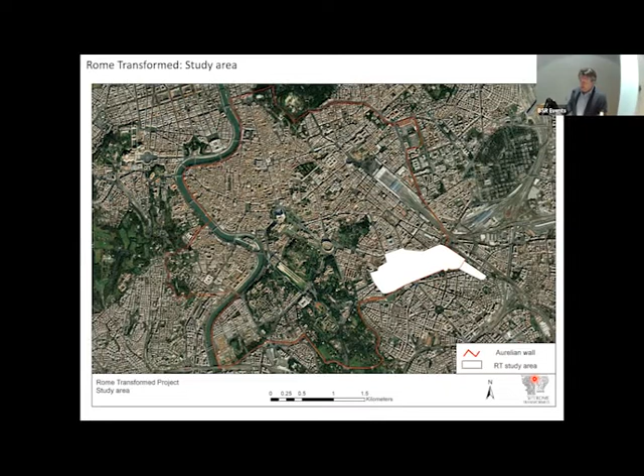Previously, the principal investigators of the project, Professors Ian Haynes and Paolo Liverani, conducted long-term research on the Basilica of St. John Lateran, published by the BSR in 2020.

The Lateran, taken as a starting point, was to the west. The new project has investigated some of the major monuments in this area, such as the Neronian Aqueduct, the 1.5 kilometers of the Aurelian walls, which you can see running along the back there along Via Carlo Felice, and also the final part where we see now in the video, the area of the Sessorian Palace complex at the site of Santa Croce in Jerusalem.

The aim of the geophysical surveys is to assist in investigating the near surface, to understand the appearance and transformation of the area over 800 years, covering 68 hectares in a central urbanized area.

The areas identified as suitable for prospection were divided into subgroups based upon the most appropriate method, given a number of different parameters that can affect each technique.

This evening, I will focus on some of the areas indicated in red, surveyed with single channel ground penetrating radar, which I'll abbreviate as GPR, and some of those in blue, which have been investigated with both GPR and electrical resistance tomography, which I will refer to as ERT.

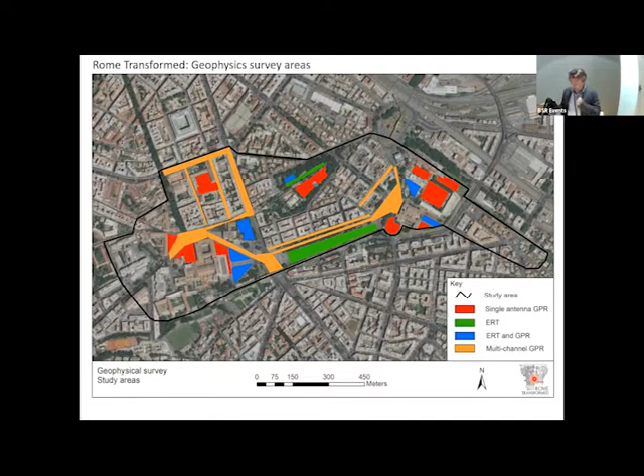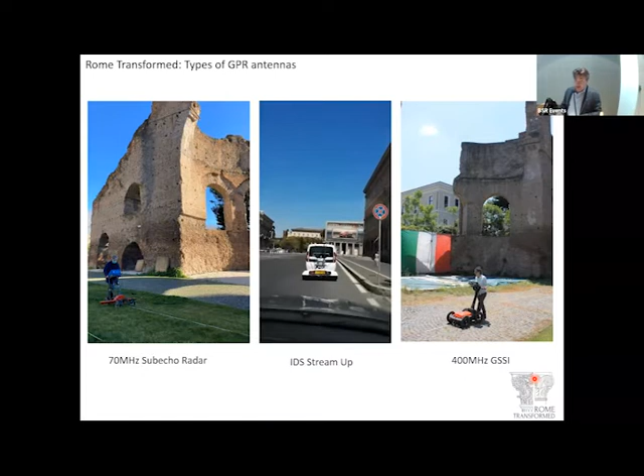I will not dwell in this lecture upon the specifics of the different types of geophysical prospection and the techniques that have been used. There is excellent and long literature on this amazing topic, which is something we specialize in at the BSR for a number of years.

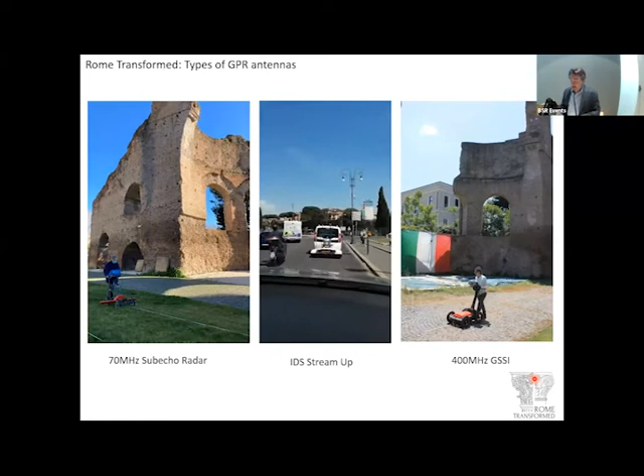I've spoken on a number of occasions about the different techniques we do, and I'm happy to speak to our citizen course students about this should they wish, but this evening I shan't dwell upon the specifics. It's sufficient to note that the majority of the work was conducted using different antennas and configurations of the ground penetrating radar, as it is this instrument which is best suited to modern urban investigations. However, in some areas, this data was enhanced with ERT, the electrical resistance tomography.

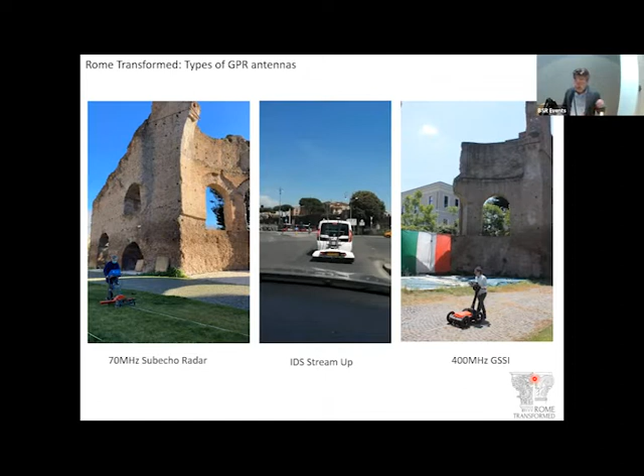Before I begin our journey across the Caelian Hill, I would like to note some of the difficulties faced in this form of investigation in a modern city, which is why this survey is so complex, but it's quite unique.

It is clear from any brief glance at ancient cartography, such as Nolli's incredibly precise map of Rome of 1748, the changes that occurred to the topography of the city inside the Aurelian walls.

Indeed, one of the aims of the project, led by Margherita Azzari at the Università degli Studi di Firenze, is to begin to map these changes in the topography in a 3D environment. From a geophysical perspective, the changes in the topography present a significant challenge.

Topographical features such as Monte Cipollaro to the east have been flattened. This was removed on the order of Pope Benedict XIV between 1741 and 1744, as it hindered the view of the church of Santa Croce from the Lateran.

Whilst to the west, the modern Via Emanuele Filiberto and the underlying metro cuts through the Caelian Hill. This therefore limited our choice in the techniques available, with a particular need for low frequency GPR antennas. These offer a greater depth of penetration, though at a loss of some resolution, and also the widely spaced profiles of ERT.

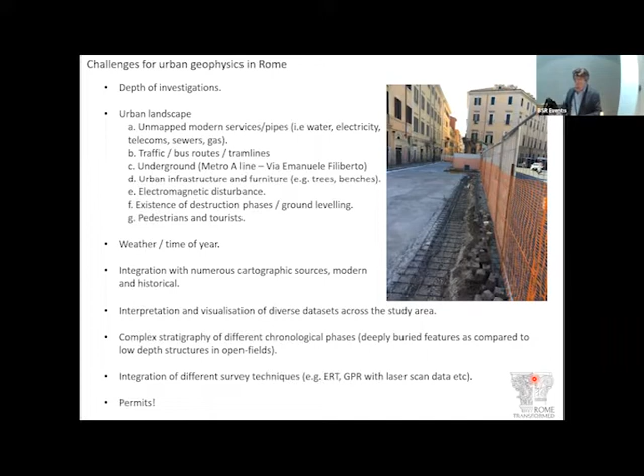The Rome Transformed project stems from a previous investigation of the Basilica. The research strategy and methodology of that project have gone a long way to structuring this new ERC-funded project.

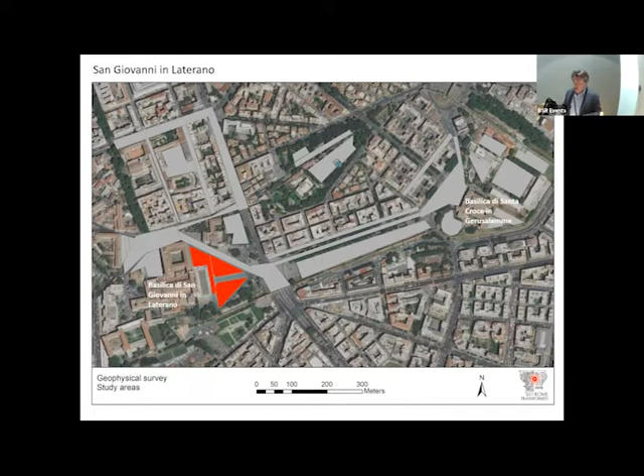The project uses high-resolution data capture and digitally aided interpretation for analysis and to support more traditional scholarly approaches. This form of recording allows the visualization of structures that are otherwise cut and decontextualized by later interventions.

The recording leads to the development of 3D models, termed by the project as provocations, aimed at encouraging wider discussion. The geophysics forms an important element in this process, as it allows exploration of the subsurface across an extensive area, which would otherwise be invisible.

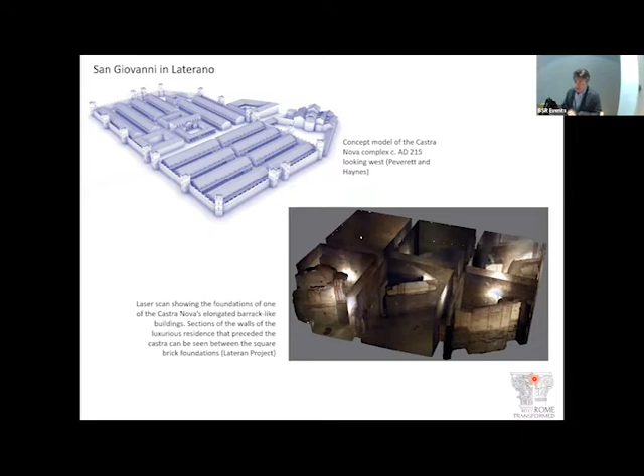In brief, the first archaeological evidence of occupation underneath the Basilica of San Giovanni Laterano is a wealthy residence of the 1st century AD, the fourth style decoration of which suggests a Neronian date. Of importance to a geophysical survey is the depth of these structures beneath the current basilica, an average of 5.5 meters.

The buildings were later replaced by the second barrack complex of the Equites Singulares under Emperor Septimius Severus, constructed around AD 193. At the beginning of the 4th century, these structures were cut to make way for the Constantinian Basilica. The new project has included re-examination of these areas explored with geophysics in the earlier iteration of this research, in particular to extend the survey to a greater depth, as mapping the changing topography of the area is of crucial importance to the project.

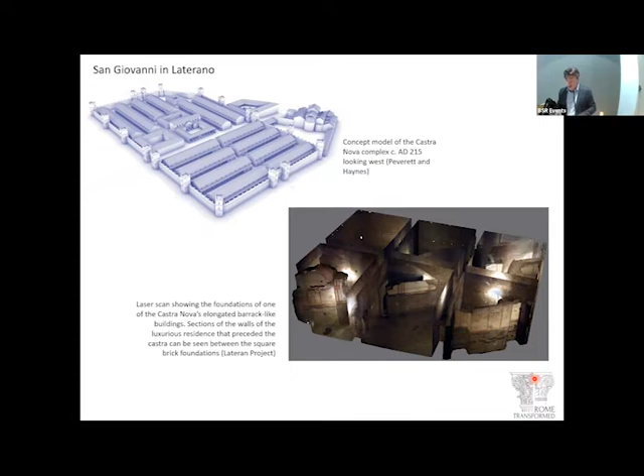Before I show some results of the project, I should quickly note how this data should be read. The GPR data is collected as a radargram, a vertical profile into the ground. Through the collection of numerous profiles in regular traverses, either simultaneously with a multi-channel system, or as individual profiles using a single channel system, it's possible to build up a volume of data that can subsequently be resampled horizontally, where the thickness of each slice can be varied.

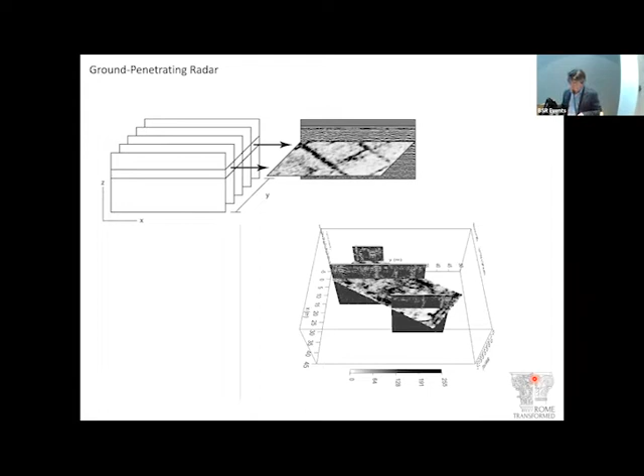Together with various assessments for the potential rate of the radar through the soil, it's possible to give an approximate depth. So as I show you the data we've collected, these should essentially be read as a map. While collected slightly differently, the same methodology applies to the ERT in terms of the collection in vertical profiles and then a subsequent horizontal reslicing.

So here we have our first example of what I'm asking you to look at, essentially in plan. The earlier survey with GPR by Salvatore Piro had been very successful, recording a range of features directly in front of the current basilica, revealing probable parts of the triclinium of the Patriarchium built on the order of Pope Leo III. However, the GPR had limited penetration beyond 2.5 meters.

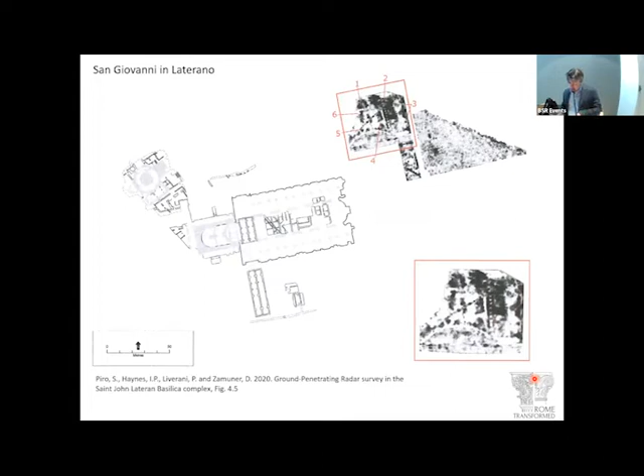We know from the considerable mapping undertaken in the former project, to which I just referred, that Republican houses under the basilica can be at a considerably greater depth. So the houses we're talking about are underneath this area here, and we're in the piazza just in front of it. Therefore, the piazza in this area here was resurveyed by the new project with a lower frequency antenna.

This 70 megahertz antenna, however, similarly had some problems in terms of penetration beyond 2.5 meters. Unfortunately, this can be caused by highly conductive layers, in particular due to high moisture content that can lead to significant attenuation of the signal.

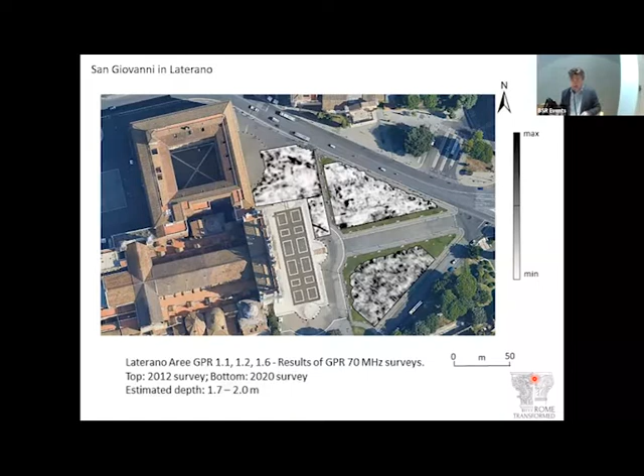Therefore, in order to assess the area at a greater depth, it was also investigated using ERT. At a depth of 4.9 meters below ground level, the ERT recorded areas of high resistance, seen here on your color scale in the area in what is red towards black. In particular, these are shown up towards the eastern edge of the piazza. The substantial nature of these areas of high resistance may perhaps indicate accumulations of material or changes to the topography in front of the basilica.

Continuing a further 2 meters in depth from that previous example, the horizontal data slice of the ERT is showing both the continuation of these areas of high resistance in red, as well as large pockets of low resistance, in this case towards the blue-purple areas, which can be caused by fine or wet material, or indeed backfilled cavities.

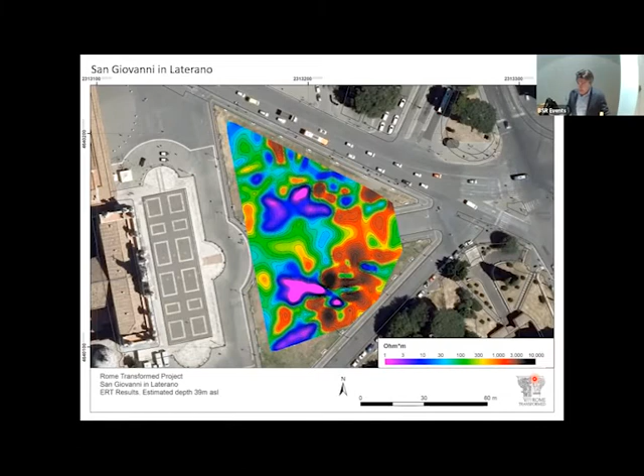The next step for us was therefore to compare this data with the historical cartography of the area and to drill a series of environmental cores at key points within the piazza. In this section here, and this core here, I'm drawing heavily on the work of my colleagues Carlo Rosa, Francesco Carbone, Gianfranco Morelli, and Filippo Bailey.

A comparison of the ERT with the cores indicates that the areas of low resistance may be related to quarrying activities for red pozzolana. So we're looking at this depth here. Here's the location of our core - I'm not sure which is over here on our screen.

So the formation of this red pozzolana has been noted here in this area of the Caelian Hill, but also elsewhere. In correspondence to the core which I've indicated here, we also have an area of high resistance, which is up here.

In the core shown at the bottom of this section, we also have some archaeological material. A current working hypothesis for the team, based on the low resistivity values of the ERT, the higher values on the edges, and the material coming from inside the environmental core, is that this may be related to collapsed pozzolana quarrying tunnels.

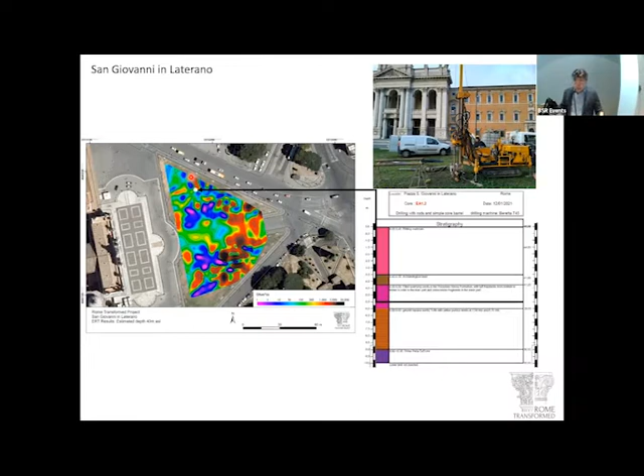Moving eastwards from the Basilica of San Giovanni, the next open area investigated by the project were the gardens of Villa Wolkonsky, now the current residence of the British ambassador to Italy and San Marino.

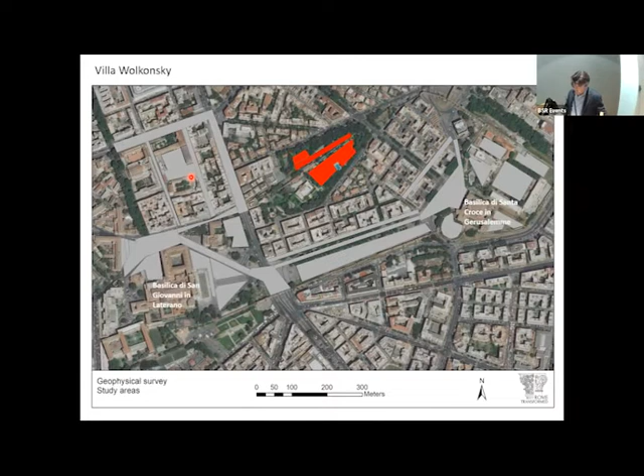At the northeastern corner, just outside the property of the embassy, are a row of Republican tombs, the earliest dated to the 1st century BC, which you as students of the City of Rome course probably visited last Tuesday. These tombs and the Via Caeliamontana onto which they faced provide us with a useful marker as to the ground level of the late Republican period.

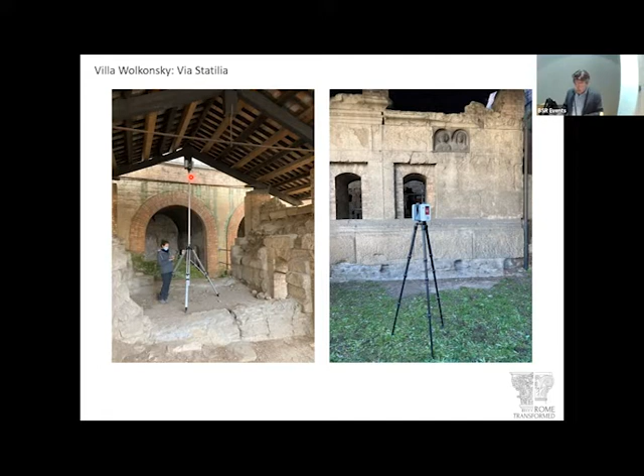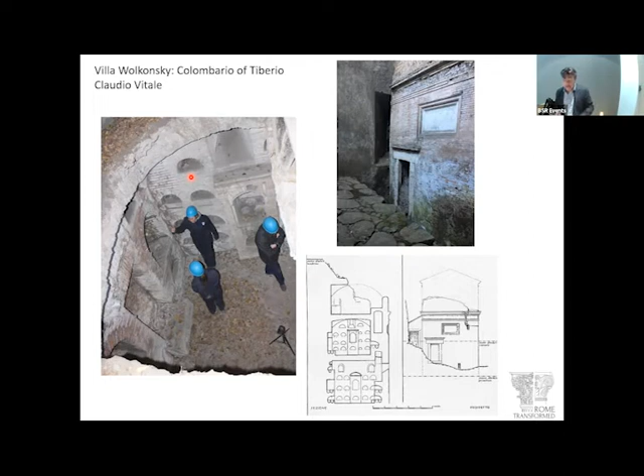Of particular interest for the geophysical prospection is the depth of the road in front of the monument. Whilst the road level, as you can see in the slide on the top right, seems to have been raised several times since antiquity, the imperial ground level is approximately 8 meters below the modern ground surface.

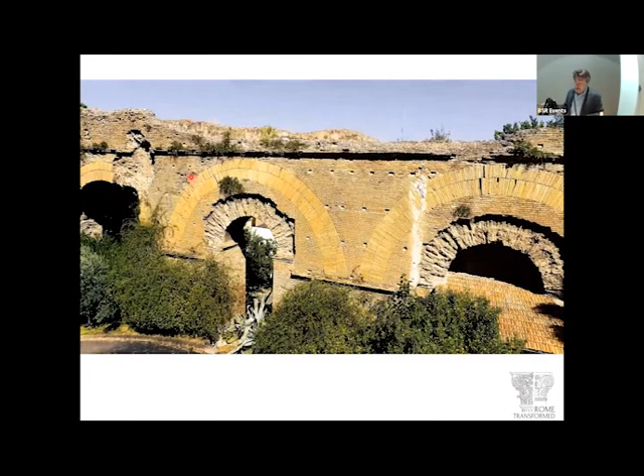A further indication of the significant change in ground level is provided by the subsidiary branch of the Aqua Claudia, built under Nero, that began at Porta Maggiore and traverses the length of the villa grounds for a distance of 370 meters, with 36 standing arches.

The branch begins at Porta Maggiore, a few hundred meters to the east of the villa, where most of the aqueducts feed into Rome, as this was one of the highest points of the city.

The Neronian aqueduct is one of the principal monuments of the Caelian Hill, as it crosses the length of the study area towards Piazza San Giovanni Laterano, onwards to Piazza della Navicella, where it turns above the Arch of Silanus and Dolabella, or the Porta Caeliamontana, which was discussed here in a lecture a few weeks ago by Rita Volpe discussing Servian walls, before it turns and heads towards the Temple of Claudius and feeds into the Nymphaeum alongside the temple complex.

The aqueduct has been extensively recorded using laser scanner, drone photography, which you'll see here, and standing building survey. But it is the accumulation of material around the aqueduct that has a strong influence on the geophysical prospection.

In this drone footage, made by colleagues from the University of Siena, the upper part of the aqueduct is clearly visible, whilst from access points alongside the aqueduct, it is known to continue for a depth of at least 8 meters, like the columbarium we just saw to the north.

The final section, as you saw in this short video, shows the gardens on the southern side of the aqueduct, where the GPR survey was conducted.

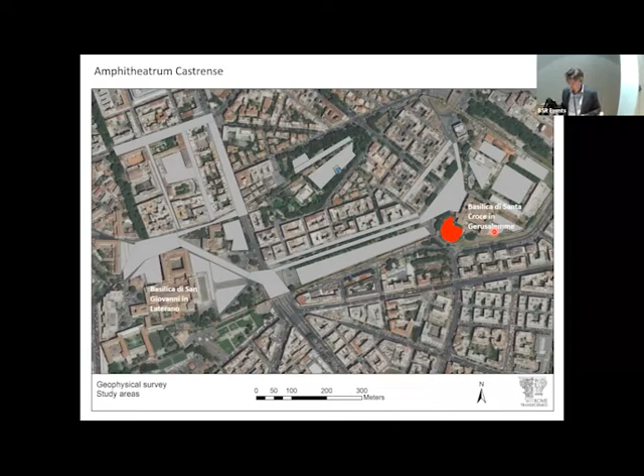Perhaps one of the lesser known amphitheaters in Rome, the 3rd century AD Amphitheatrum Castrense is now quite unassuming. In part it was later incorporated into the Aurelian Wall. The structure was well preserved up until the 16th century, but was later reduced, as in this drawing here from our own BSR library by Giovannoli, as it was reduced for defensive needs.

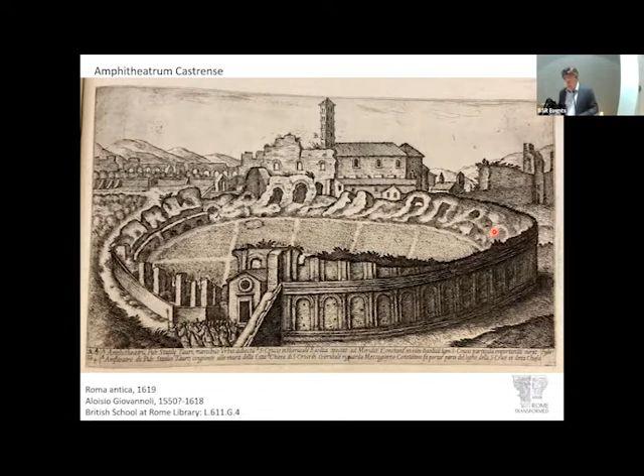Built on a high point at Santa Croce, it has an ellipse shape, with maximum measurements of 88 meters in length, 75.8 meters in width, and a circumference of 252 meters. Although now little is preserved of the cavea, it is estimated to have accommodated around 3,500 spectators. Its inclusion into the Aurelian Wall some 50 years after its construction suggests it had by then lost its function.

The GPR survey conducted inside the amphitheater by the BSR was undertaken using a 400 megahertz antenna, a slightly shallower form of antenna than the ones we've seen elsewhere, such as at Villa Wolkonsky. This, as you can see in the middle photograph, allows us to have a tighter line separation, so the areas here were surveyed at a regular interval of 25 centimeters.

The area was first surveyed using GPS and total station in order to establish a precise grid within real-world coordinates. The recording of all the project surveys, geophysical, topographical, and coring, with GPS has been fundamental, as this accurate recording will allow the integration of all these data sets collected by the project and the analysis of them within the 3D GIS.

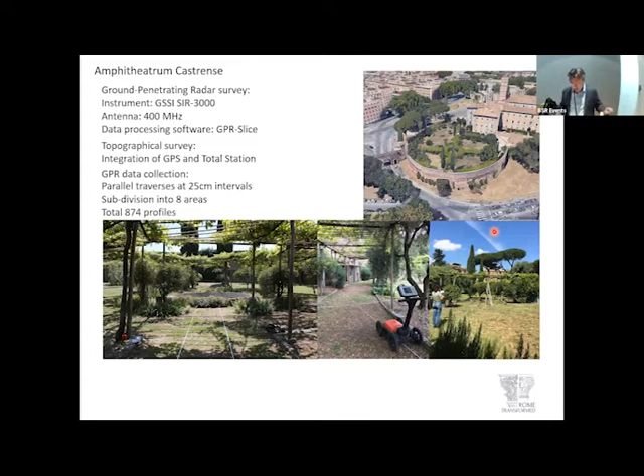The survey, in particular in the northeastern corner, has recorded a number of high amplitude linear features, which may be associated to structural support for the arena or the cavea, which again, as I said, was demolished in the 16th century. So in particular, I'm focusing on the northeastern area, on these structures up here.

And some traces a little bit in this slice of the data at 0.7 to 0.9, this one at 0.6 to 0.8 meters below the ground level. We're showing some features in this area here, which I'm indicating, and in particular we're interested in this area up here.

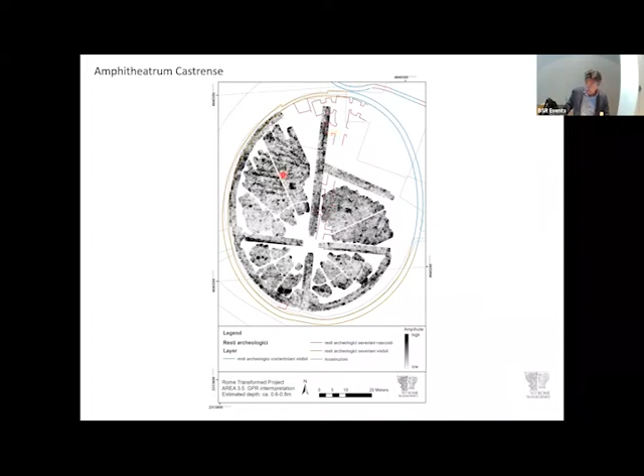Placing a slice of this data, recorded between 0.7 and 0.9 meters, alongside the best preserved plan we have of the amphitheater, drawn by Palladio in the 16th century, it is possible to see how the features may be related to supporting walls or service corridors underneath the arena.

This hypothesis may also fit with the approximately positioned excavations in the center of the amphitheater noted by Lanciani, which I indicated here in dark red. Lanciani noted in Rovine e Scavi di Roma Antica that the arena had actually been excavated six times. However, curiously, he also notes that in an excavation of 1828, these excavations concluded with no results.

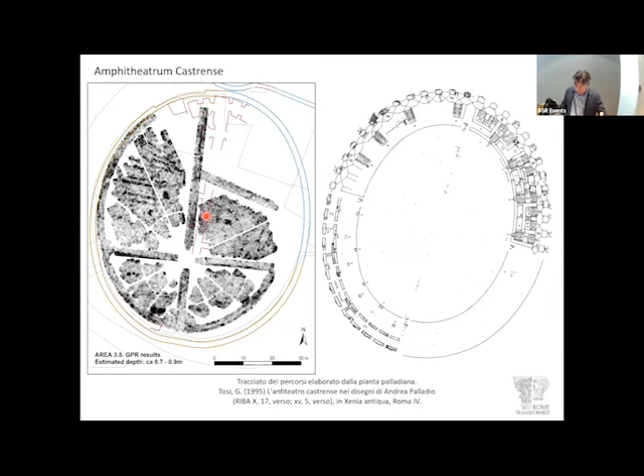At the northern end, parts of the lower section of the amphitheater are still accessible and were recently laser scanned by the project. Here we are grateful for the assistance given to us by the group Roma Sotterranea, who helped give us access in safety to these areas underneath the amphitheater.

Our interest here was obviously to record the structures of the amphitheater underneath, and also to compare the structures and their depth with the GPR survey.

This area here, which you can see on the bottom right of your screen in these images from the article of Colli et al., which I've cited at the bottom, were probably those recorded by Ficoroni in Roma Antica of 1744, when he speaks of a priest who in 1740 discovered the crypt and said it was largely full of animal bones, which probably relates to this area here.

The next phase of our analysis in this area will be to assess these geophysical features, the ones I've just showed you in the northwest corner, together with the structural analysis of the standing walls, recorded by the laser scanning within a GIS environment, to see if we can look at the changing levels within our GPR data and that of the laser scanning.

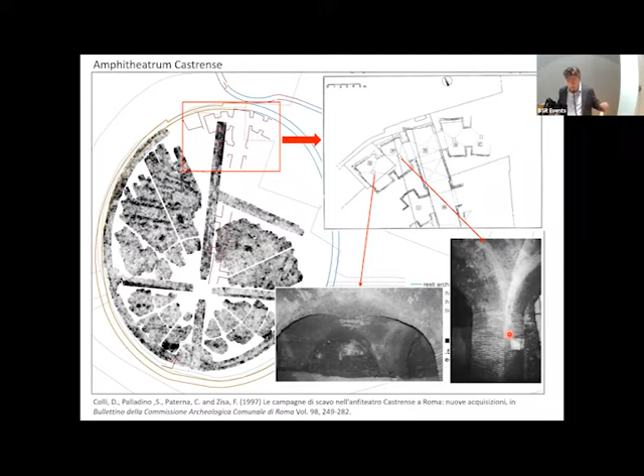Leaving the amphitheater and moving 100 meters east along the Aurelian wall, the next area investigated by the BSR using GPR survey was a small football pitch at the rear of the Domus Sessoriana Hotel, indicated here in red.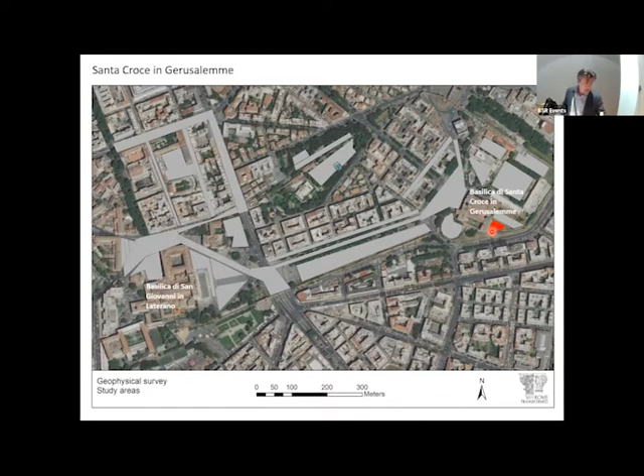Archaeologically, the area is noted for the presence of a long covered corridor, more than 300 meters in length and 14.5 meters wide, that extended from the amphitheater along the large hall that was later transformed into the Basilica Santa Croce, all the way to the circus. So the long corridor structure, as you can see here.

From the depths of the area recorded by an ERT survey and an environmental core on the northern side of the corridor, within this area here where I have my pointer, which is inside the area of the circus I mentioned before, which was later cut by the Aurelian walls, this new area was surveyed again with a 200 megahertz GPR antenna.

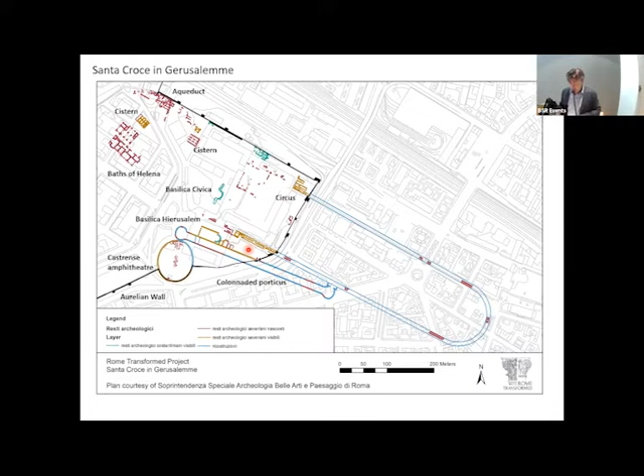Despite some areas of high amplitude recorded upon the western edge of the survey, on your left-hand side of the screen, which are probably caused by the construction of that building to the west, the survey appears to have recorded a high amplitude feature alongside the Aurelian wall. I'm referring to these areas in black, with some areas of lower amplitude in white around it.

So this is the structure which was recorded by the survey unexpectedly, of which we're extremely interested. The position of the structure close to a tower on the outside of the wall raises interesting questions as to its function. Indeed, its estimated depth from the GPR at 2.8 to 3 meters may even suggest an earlier structure.

As noted by my colleagues, it is possible that the Aurelian wall was built to avoid the structure, given the curious nature of the construction of the Aurelian wall in this section.

The final area I'd like to present in this brief tour of the Eastern Caelian Hill is a large apsidal hall in the grounds of the former Caserme dei Granatieri, now the Museo Storico della Fanteria.

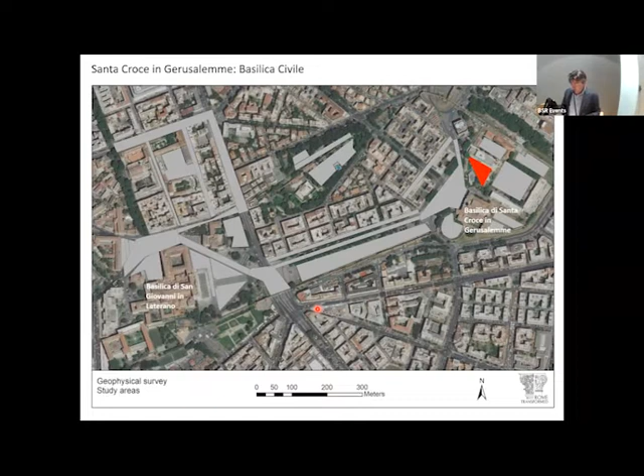The structure, which is here, dated on the basis of its construction technique to the Constantinian period, is erroneously known as the Temple of Venus and Cupid, on the basis of the discovery of the famous portrait statue of Sallustia Orbiana, wife of Alexander Severus, represented as Venus.

In this drawing on the left-hand side from 1619 by Giovannoli, again from the BSR library, it can be seen the state of ruin of the structure, and how much the building had already been spoliated in the 17th century.

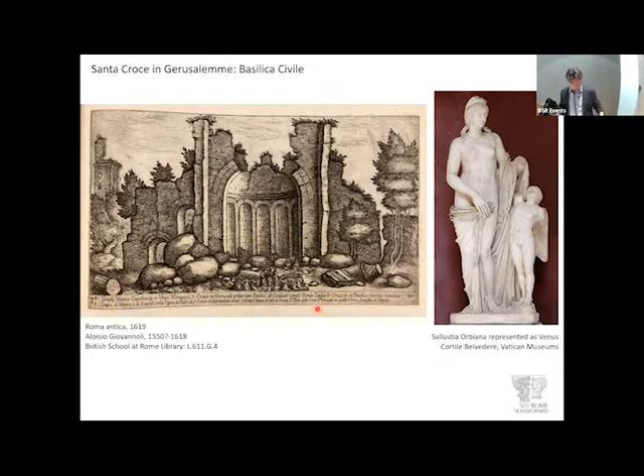Aside from some information from the published 2013-14 excavations conducted inside the apse of the Basilica, the potential continuation of the building to the west has only been hypothesized.

Therefore, given the small size of this area - see from the scale within here - it was decided to investigate this area with multiple types of antennae, each offering us a different depth penetration.

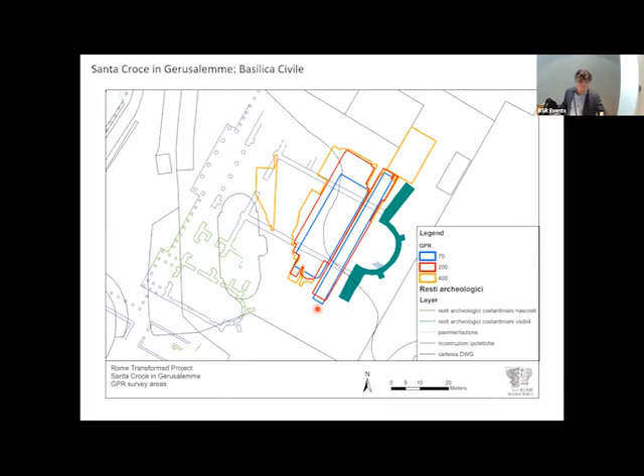This selected depth slice shows the area at an estimated depth of 0.4 to 0.5 meters, recorded with a 400 megahertz antenna. The areas were investigated separately due to different ground surfaces, including sampietrini, grass, and gravel.

Whilst the antenna recorded a number of features, the majority of these appear to relate to modern amenities and old paths, as well as the 19th century landscaping of the gardens, which raised the ground level.

So I'm referring again to this high amplitude, which you see in black. This area here relates to modern paths, and again in this slightly separate area over here, it relates to paths which have since been removed. And then you have these sort of parallel lines down here, which relate to modern amenities.

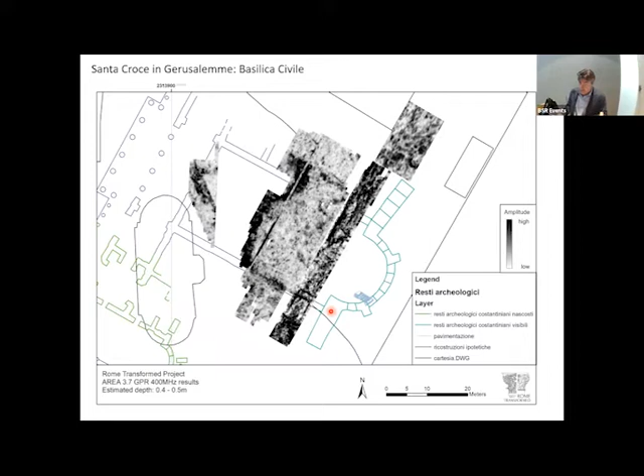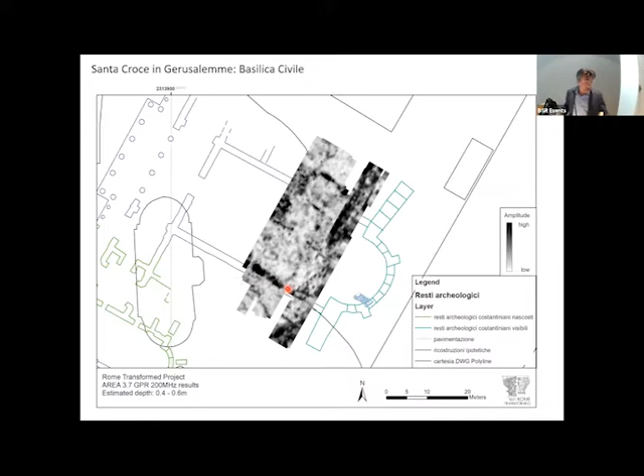A smaller area was also surveyed with a 200 megahertz antenna, but similarly to the 400, it recorded some subsurface features, but also at a very shallow depth. So again, these darker features here we interpret as being modern.

Therefore, beyond the depth penetration we were achieving with either the 200 or 400 megahertz antennas, in order to continue our investigations at a deeper level, the area was also surveyed by my colleague Salvatore Piro with a 70 megahertz antenna.

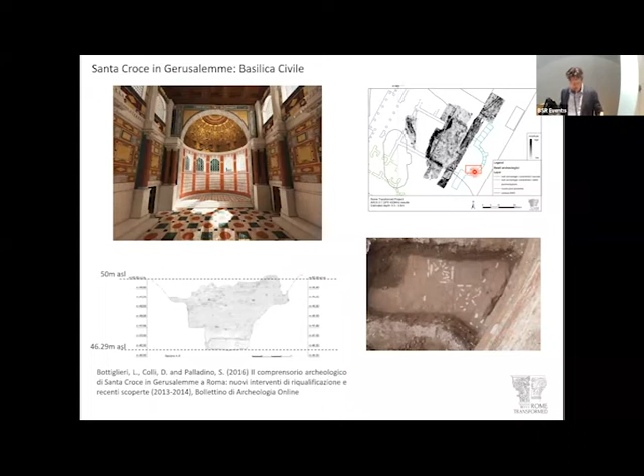While similar results were recorded in the upper levels, at an estimated depth of 3.8 to 4 meters the 70 megahertz antenna highlighted areas of high amplitude in the southwest corner, particularly focusing in this area here.

And more or less in line with the hypothesized southern wall of the Basilica Civile. Moreover, some features on a northwest-southeast alignment were recorded at the very southern limits of the survey, so down here.

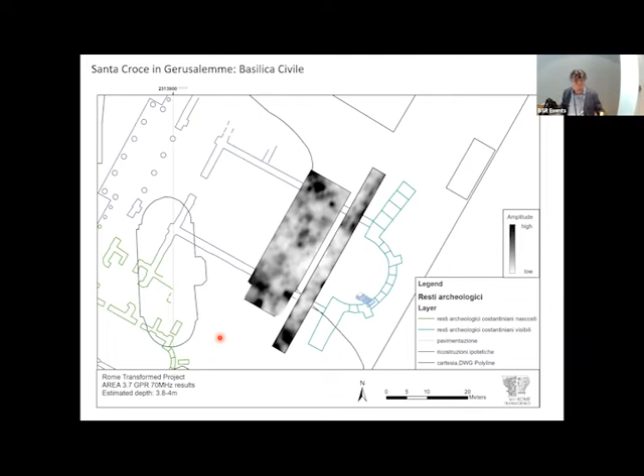To test this result further, a small ERT survey was also conducted in the grass in front of the apse, the parameters of which are shown in this slide. Each probe location was individually recorded by GPS in order to topographically correct the data.

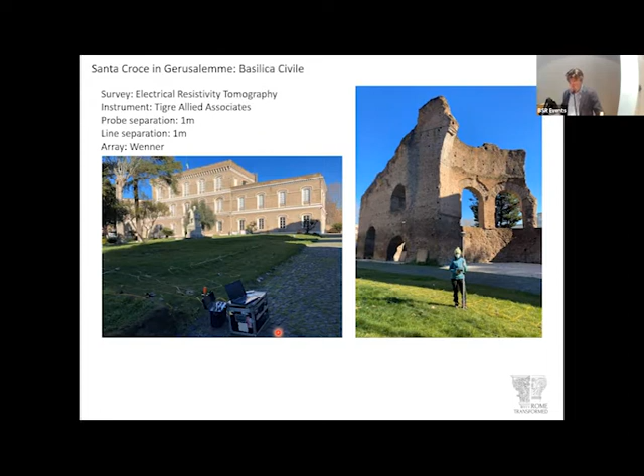At a similar depth to the 70 megahertz antenna, around 3.5 to 4 meters below the modern ground level, the ERT recorded two parallel areas of high resistance, interestingly in correspondence with the hypothesized northern and southern walls of the Basilica on this plan. The depth also corresponds with the floor surface of the Basilica, which was recorded in this small excavation to the southeast at 3.7 meters.

Furthermore, at a depth of between 6 and 6.5 meters, the areas of high resistance continued to be recorded, perhaps indicating that the wall foundation continued for an approximate depth of another 2 meters beyond the floor surface - feasible given the height of the standing structure.

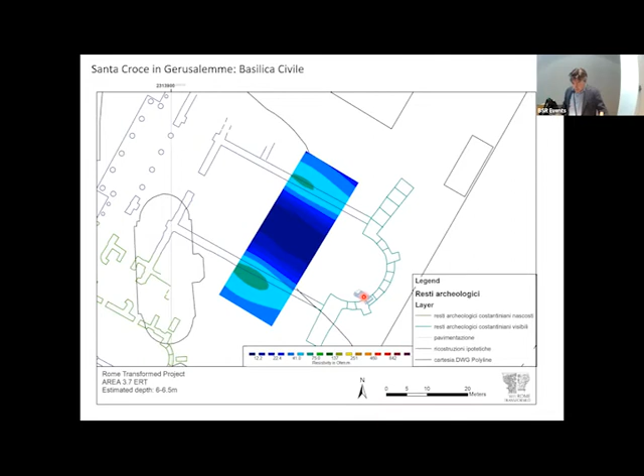When comparing the generated depth slice with a topographically corrected pseudo section of an ERT, the major areas of high resistance correspond with the hypothesized location of the walls. Other pockets in the upper part, where I have my cursor, of high resistance may have also been caused by the destruction layers, which include rubble. Thinking back to that drawing of Giovanni, and also within the excavation conducted inside the apse, which recorded layers of rubble in the upper areas.

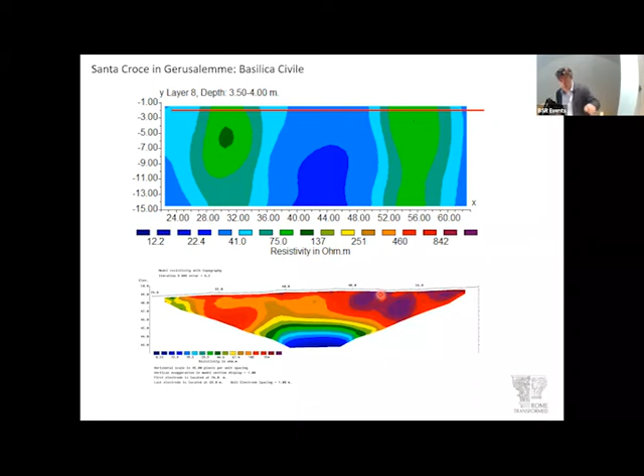The areas I presented this evening are just a small sample of the ongoing geophysical investigations. The data from other areas around the basilicas at Santa Croce and San Giovanni are currently being analysed by colleagues from CNR.

Whilst the survey of the 3.5 kilometres of roads around the Caelian Hill, seen here, has been completed by colleagues from GeoStudi Astier using a multi-channel system. This represents an enormous data set in a very archaeologically rich area of this part of the Eastern Caelian Hill, and will require some time to process.

The road network, in many ways, offers the most extensive window we have in the area into the subsoil. However, the analysis is complicated by many of the factors that I listed at the beginning of this presentation, in particular the unmapped utilities and the routes of the public transport.

This survey is recently completed, and our analysis of this data set is ongoing. But you can see it will tie in to some of the work that I presented this evening in the area of San Giovanni Laterano, and also in the area in front of Santa Croce in Jerusalem. So this will be an update for a future lecture.

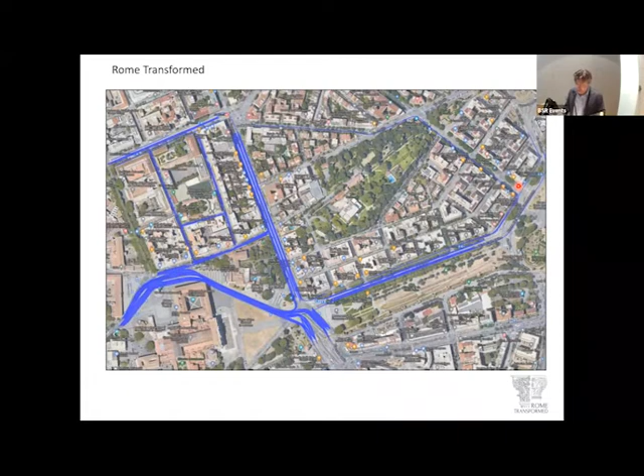The methodological approach of the geophysical surveys around the Eastern Caelian has been to use, where possible, multiple techniques suitable for deep investigation, which where possible are coupled with targeted coring.

Over the coming months, the project will complete the extensive geophysical surveys and begin to bring the data into a project 3D GIS. Combining this information together with the rich archival data being collected from the many archives in Rome, the resource of the ArchaeoSITAR database of the Soprintendenza, and the standing building surveys being conducted alongside the geophysical surveys, is aimed to answer some of the questions which I raised at the beginning of this presentation regarding the transformations of this key area of Rome.

To conclude, to the east of the Basilica of San Giovanni, it's becoming clear from our recent work that the area may have been in some part used for quarrying, perhaps prior to construction of the Castra Nova, given its very close proximity. At the Sessorian Palace, there are still aspects to understand concerning the amphitheater, as well as the form of the Basilica Civile, both representations of private and public power. The potential of a structure that influenced the direction of the Aurelian wall, which we saw earlier, is also intriguing.

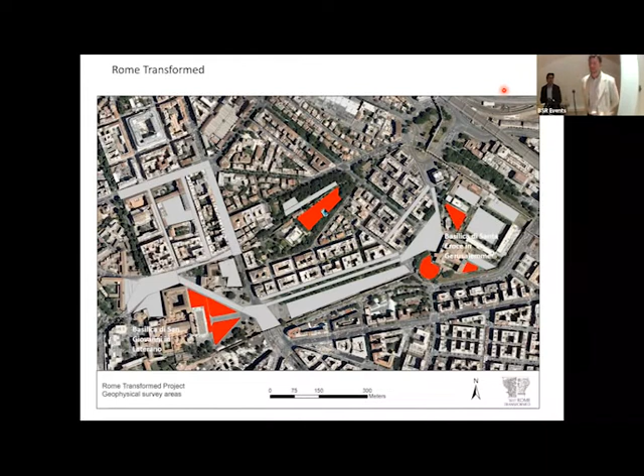Thanks so much, Steve. Can I ask you to speculate about that building that you said the wall might have gone round, the Aurelian wall might have gone round? And if you can do that, could you also say why would it have avoided that building and then gone straight across the circus? Any ideas?

It's a good question. At the moment, no. This is data we collected fairly recently. We are currently having a series of meetings with Teo as well, who's online here, discussing what some of the options are. I kind of thought of associating this structure to the Aurelian wall itself is a possibility, but also the depth at which we're seeing this structure, 3.5 to 4 meters, potentially suggests that perhaps it's earlier than what we're seeing. So hence the idea being perhaps it is an earlier structure which the wall in some way avoided. A tomb or some sort of structure like that is a possibility, I guess.

As I said, these are working hypotheses which we're talking about at the moment as to what sort of structure would be expected to be seen in that area. We know it was quite urban from the 3rd century AD. There were already quite a few structures within that area. But as to the exact purpose or what it could be that they're trying to avoid, I'm not too sure. So hopefully come back in October, we might have some more answers.